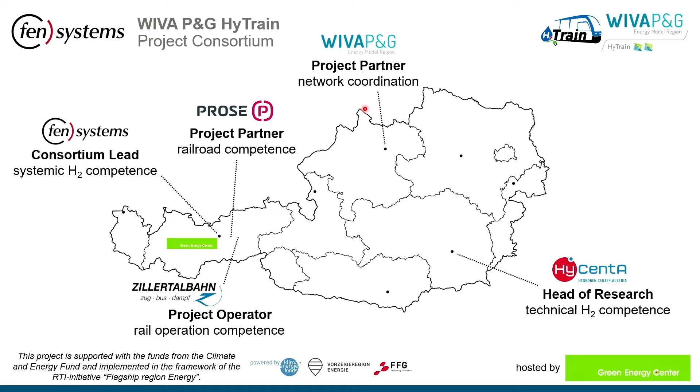As I mentioned, FEN Systems initiated this project to build up know-how for quality assurance and risk minimization for the implementation of a hydrogen train. So the first objective was to establish the state-of-the-art for hydrogen trains by means of train simulation and test bench operations, and also to develop a holistic hydrogen infrastructure concept.

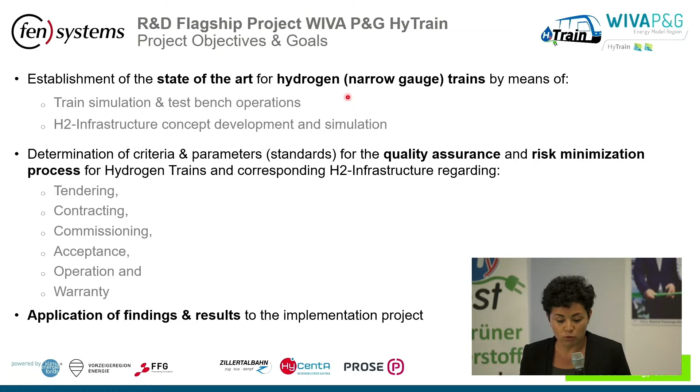The second objective was to determine criteria and parameters for hydrogen trains and corresponding hydrogen infrastructure for the quality assurance and risk minimization process, regarding tendering, contracting, commissioning, acceptance, operation, and warranty. And the last objective was applying all the findings of this research and development project to the implementation project, which is now foreseen in a follow-up project.

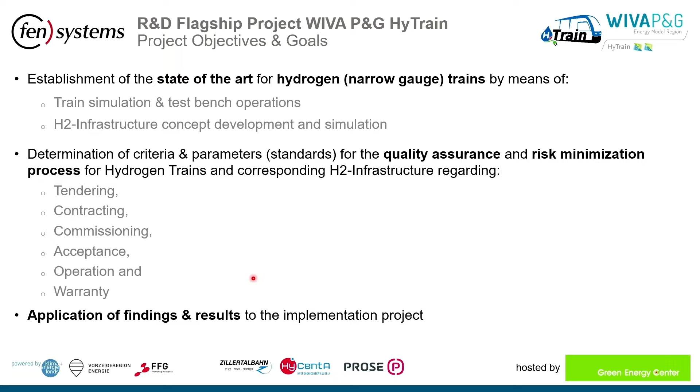So now with the objectives clarified, the project developed two research teams, one focusing on the hydrogen train and one focusing on hydrogen infrastructure. For example, for the hydrogen train, the main research topics are the lifetime of the train and the optimization of the energy consumption, since these two parameters have an important impact on the operational costs, but also degradation of the fuel cell system, health monitoring using real-time state recognition, and improvement of the operation strategy and optimizations for lifetime, efficiency and performance.

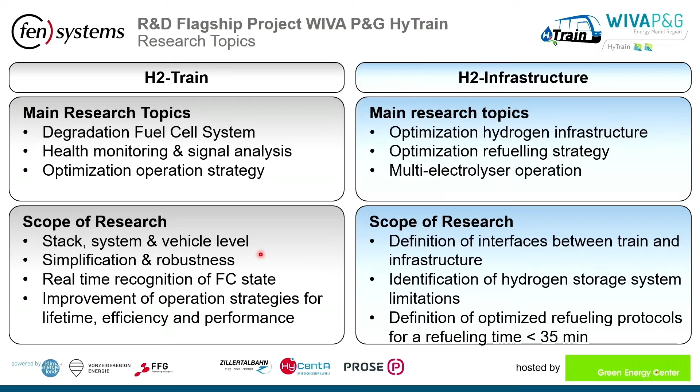Regarding the hydrogen infrastructure, the main focus was the interface between the hydrogen train and the hydrogen refueling station. And for that, a refueling protocol was developed in terms of cost efficiency and time of refueling. So now I would like to give you a broader outlook regarding what has been done.

So for example, when it comes to degradation and health monitoring, no device other than cell voltage monitoring is available, where each cell is wired, so the measurement is prone to error. And in HyTrain, we came up with the concept to develop a fuel cell system monitor with two sensors for simplicity, and also to introduce new methods of signal analysis, for example, nonlinear response analysis, time series analysis, and utilization of system-caused perturbation.

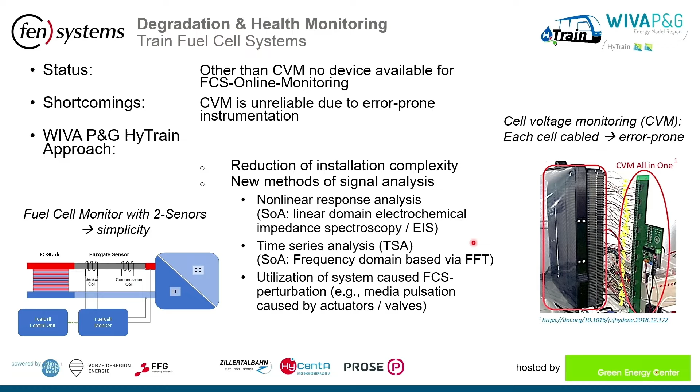The fuel cell system monitoring hardware was developed in collaboration with the Graz University of Technology, focusing on system integration and software development, but also establishing time series analysis, and in addition also considering adaptation of speech recognition algorithms in this application.

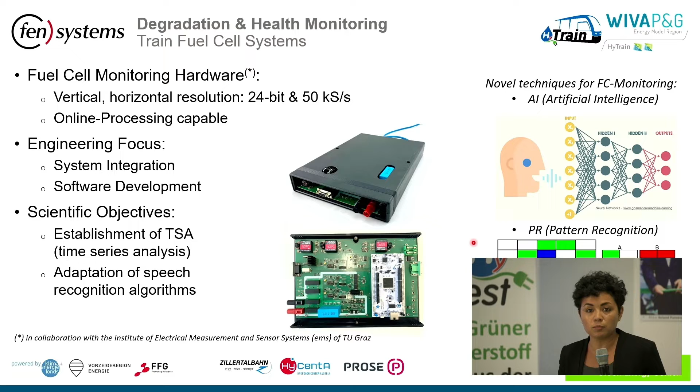Now regarding the interface of hydrogen train and hydrogen infrastructure, as I mentioned, a refueling protocol was developed and optimized by considering an optional pre-cooling. So this protocol is now in place, while currently there are no standards for hydrogen trains. And this protocol can be used now further for the industry to support them in this technology.

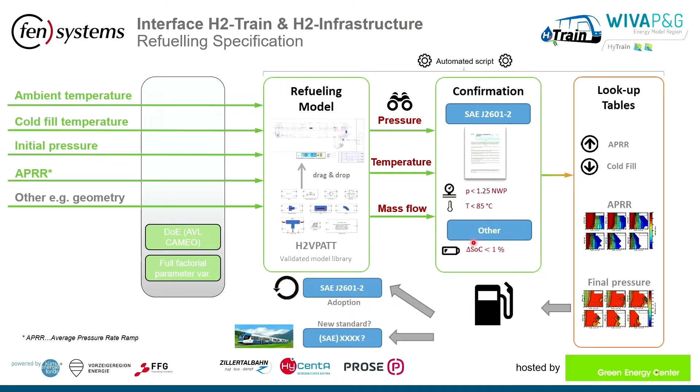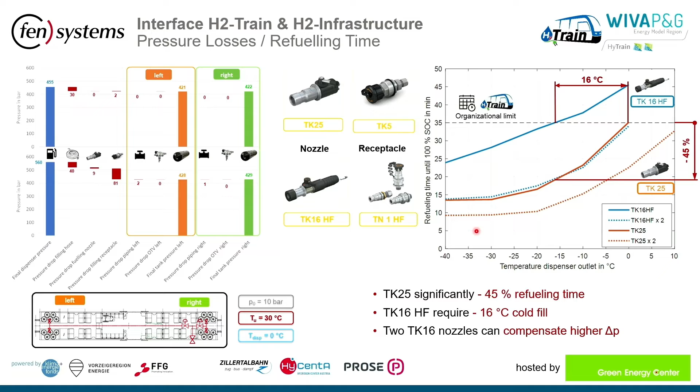So now if we use a TK25 nozzle, you can see that we can significantly reduce the refueling time. And interestingly, this behavior is similar to the behavior of two TK16 high flow nozzles, which additionally compensate also higher differences in pressure. So now this protocol, developed and optimized, is at our disposition, ready for use in industry, since it's going to reduce also a lot the cost related to the infrastructure.

So all in all, everything progressed quite well in the HyTrain project until now. In addition to the other studies which are still in progress, we saw that the concept for the hydrogen refueling station is developed, and the refueling protocols are available for use. Regarding the energy storage and powertrain system, the basic operation strategy was developed, and currently optimizations regarding lifetime and energy consumption are also in place.

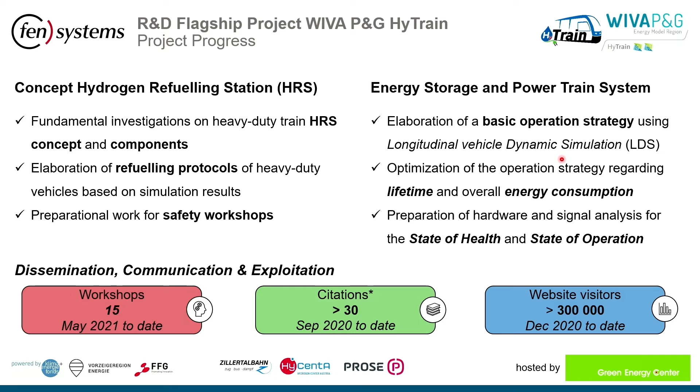Also, some words regarding dissemination, communication, and exploitation. Until now, we had 15 workshops, more than 30 citations, and the number of visits on the project website is still increasing. And we will be handling the project website also beyond the project completion. So all in all, one can say that everything is in place for this hydrogen technology to be introduced to the hydrogen trains and operators in a knowledge-based and risk-minimized way.

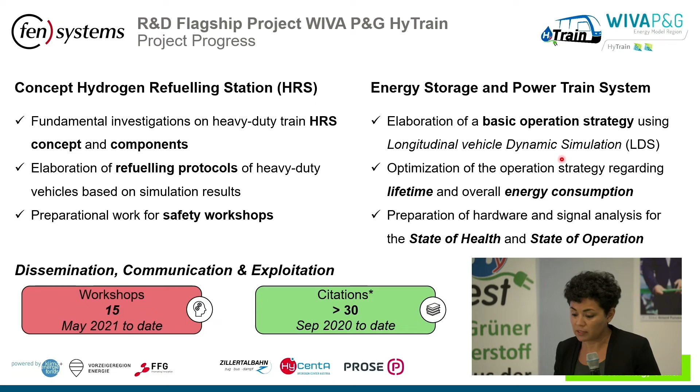So Ernst Fleischhacker already showed you an insight into the bigger picture. What I would like to focus on is the impact of HyTrain on the European projects that we are currently working on within FEN Research in European consortia. As an example, in the Most Hydrogen project, where we are investigating novel technologies for hydrogen storage, we are really using the comprehensive data from HyTrain for the detailed data input, which would not have been possible without HyTrain.

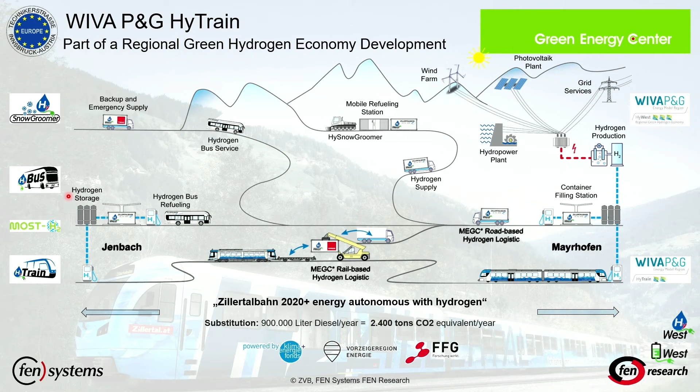Also, many developments in HyTrain are now the basis for the difficult build-up of the green hydrogen economy at the regional level, which started with the development of the hydrogen highway in 2014 in the frame of the Tyrol 2050 energy autonomous strategy, where the rollout of hydrogen cars along the Green Brenner corridor took place, and the concept for that was developed by FEN Systems for Hyundai Austria.

So this project led to the next project, green hydrogen for Tyrol and Europe, which was initiated in 2016, which is actually now itself an established green hydrogen economy. So this project is now providing the first green hydrogen to Austria and to Central Europe.

Now the third project, the Zillertalbahn 2020+ Energy Autonomous with Hydrogen. As many of you may know, the concept now has changed. Now the focus is on power on demand processes and electrification, which is still in line with the Tyrolean strategy. But of course, now for the implementation of the regional green hydrogen economy, the most important project and even the most cost-efficient project is missing, with consequences which are not yet revealed. But anyway, we simply carry on.

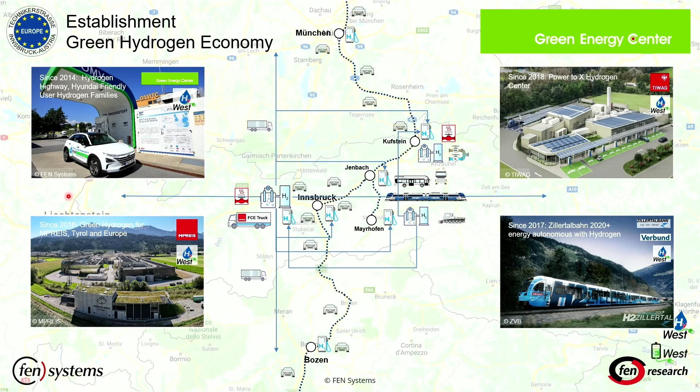The fourth project of the region is the TIWAG project, Power to X Kufstein. So this project also faced some delays, and we are hoping that these delays are now finishing soon, since this project, as the last project, is actually very important for the redundancy of the existing hydrogen technology and economy in the region.

Currently, with our partners, we are focusing on gathering all achievements in buses, trucks, and hydrogen infrastructure in an overarching hydrogen valley project from Trentino in South Tyrol to Bavaria under the working title H2 Brenner Valley. So if you are interested in joining in this next step, feel free to contact us.